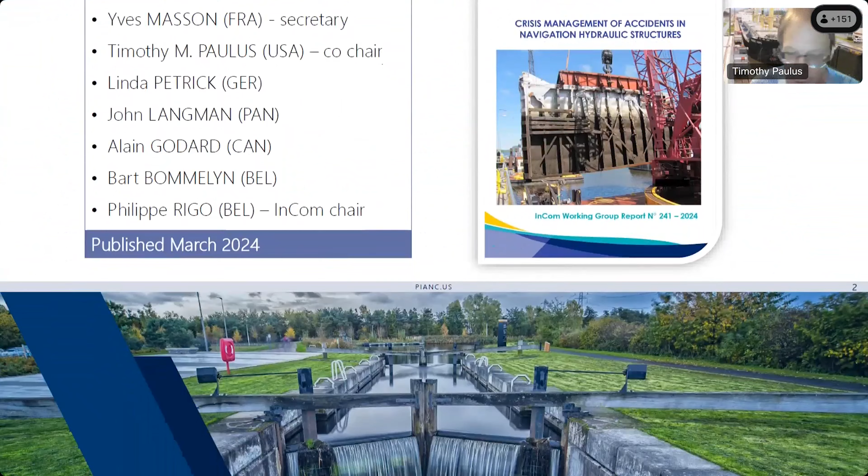Welcome everybody, thanks for joining today. My name is Tim Paulus. I work at headquarters, I've been at headquarters now for 4.5 years, coming up on 5 in September. I don't know how time flies, but it does. I've been at USACE now for 37 years. It's kind of funny, when I started back in 1987, I'm dating myself here, but I used to think people that were here this long were like dinosaurs, and now here I am. But hopefully I'm not a dinosaur.

I do want to make note, and I know Teresa mentioned this, but I got involved with PIANC back in 2010 on one of the working groups. It was a mechanical electrical working group. I didn't have a clue what PIANC was, but it's a pretty valuable avenue to really learn a lot, work with people all over the world, and get involved in a lot of different things. There are PIANC working groups on miter gates, for example, there's remote operation, there's a whole gamut of PIANC working groups. This happens to just be one of them. So I would encourage anybody, if you get a chance to actually work and participate on one of these working groups - I know everybody's busy with a million things going on - but if you really get a chance to do one of these, I would highly encourage it.

With that being said, here are the members of this particular working group, 241. This was published back in March of 2024, so just a few months ago. Richard Daniel, I don't know if Richard's on here, but Richard is the chair - I guess I consider myself a co-chair. Richard and I wrote a book together, and this happened to be one chapter in that book, this crisis management of accidents. So Richard took it upon himself to expand on this and make it an actual working group with PIANC. There's a terms of reference that has to be submitted and gets approved by PIANC, so Richard took care of a lot of that.

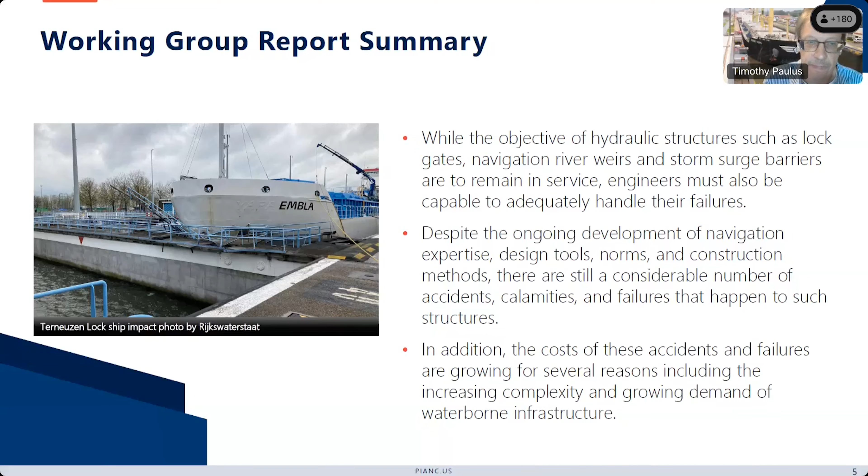So again, these navigation accidents - this report, and I'll get into that in a minute here, we did classify accidents, we did failures. A lot of times they result in the same thing: taking the lock or the navigation structure out of service. But they're very common. This particular photo that you see off to the right here, this is in Germany at the Iffezheim lock.

That happened back in November 2023, and then I've got another slide coming up on France at the Neufossé Canal back in September 2023. Thanks to Mr. Dennis Meckers in the Mobile district, I've got a couple slides on the Demopolis lock in the United States. We had a failure of the miter gate sill on that particular lock back in January.

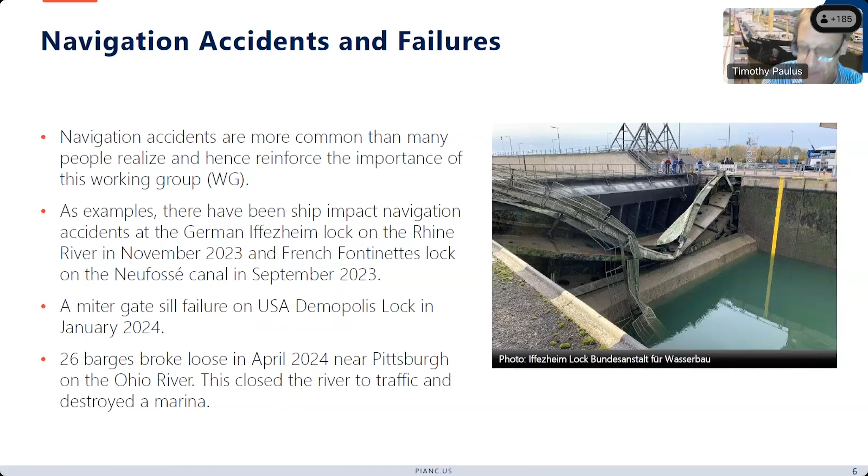Just in April, in the Pittsburgh district on the Ohio River - I don't know if anybody's on here from Pittsburgh district, we can elaborate more on that in the chat - a bunch of 26 barges actually broke loose. It closed the river to traffic. I think several of the barges hit a marina and destroyed a bunch of stuff. And I think some of these barges ended up, I think it was Emsworth Lock, where these barges ended up on the dam. So that was another very recent accident.

And then in February, there was a vessel collision with a railroad bridge in Germany over the River Hunte. This was a 110-meter inland vessel. It collided with the railroad bridge. So that's another recent accident.

And then just within the last week, I don't know if anybody saw this on the news, we got anybody from the Galveston district here, but there was a barge that slammed into a railroad bridge pier in Galveston Harbor in Texas. Oil got spilled into the water. One person was thrown into the water after the barge hit the bridge pier. He was rescued, fortunately, so nobody was injured or killed. But the tugboat backing out of the fuel storage area lost control of the two barges it was pushing. So that happened within the last week.

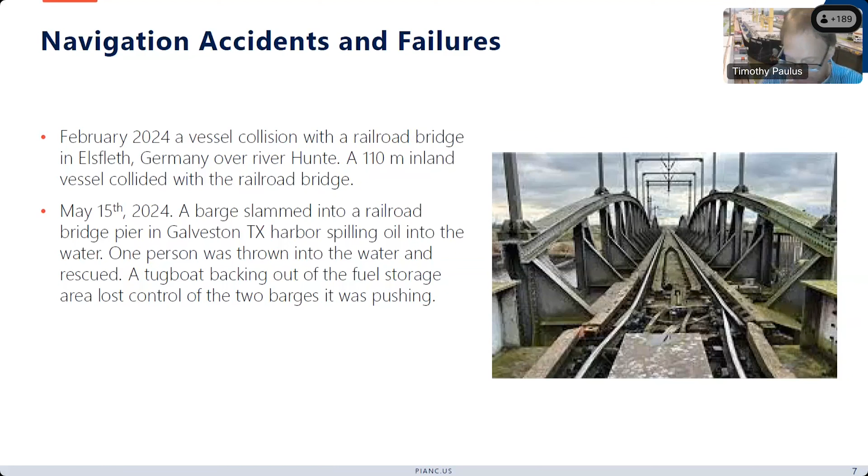Here's another photo of that ship impact on the Rhine River. This gate - at the time, fortunately, this lock has two lock chambers side by side, and they were actually working on the other lock chamber for maintenance when this accident happened. As you can see here, it completely destroyed the lock gate. It actually darn near went over the lock gate. So what they had to do was stop maintenance on the other lock chamber and diverted all traffic to it.

Now this happened back in November. If someone's online here, my counterparts, if they've got an update on the repairs of this particular lock gate, I'd appreciate putting that in the chat. But again, this happened last fall.

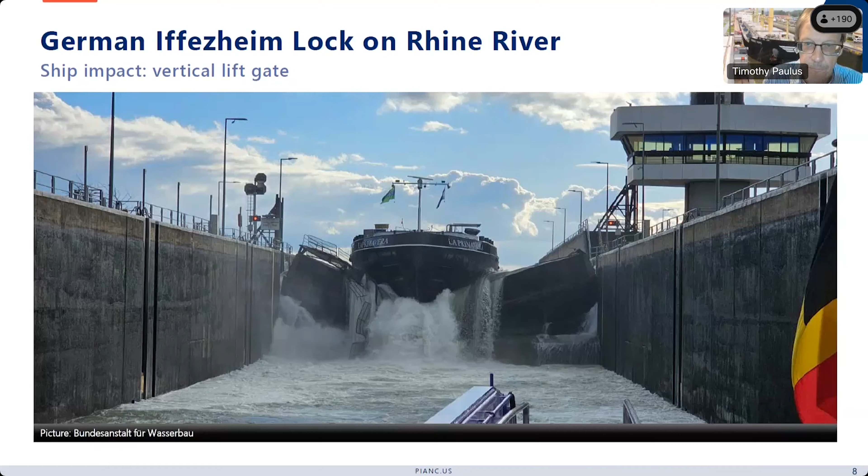This is the Fontinettes lock in France. So here, if you can see off to the right, the pilot actually had a green light to enter the lock chamber and move forward. So they did, but at the same time, the gate was closed. And then you can see some of the damage here off to the right. The ship was allowed to enter the lock - it had a green light. Fortunately, the damage wasn't extensive, but it did cause some damage to the gate itself without any major deformation.

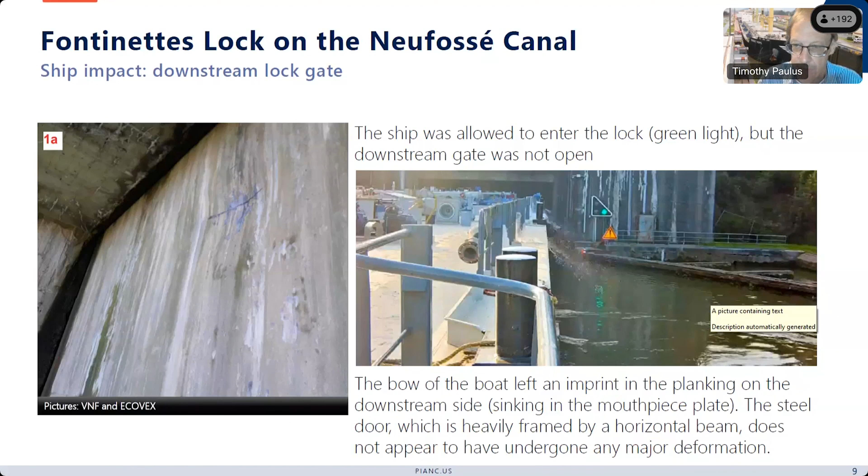This is the Demopolis lock on the Tombigbee River in the United States. This is what I mentioned previously. I know Mr. Meckers from the Mobile District was asking if there's any other locks we've had out here in the United States, or in Germany or France or Europe, where we've actually had a miter gate sill that blew out. This happened back in January of 2024 on the Tombigbee River. We actually had uncontrolled flow through this lock chamber for at least a few days. You can see the damage here off to the right.

I talked with Mr. Meckers, and Dennis, if you're on here, you can put some things in the chat. But just within the last one to two weeks, I think they were actually able to get the lock back in operation. So they're back up and running now, as far as I know.

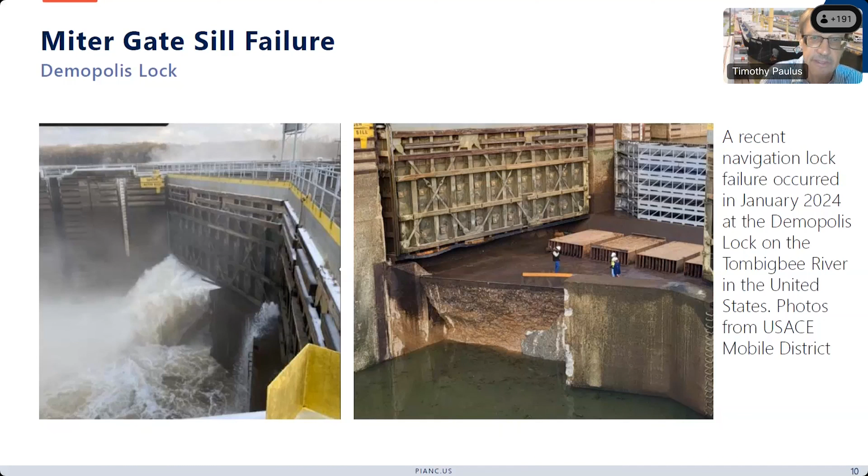So again, the key takeaway here is that accidents and failures with our navigation structures happen a lot. They happen frequently. So one of the things we tried to focus on in this working group report is crisis management plans - making sure these waterway organizations, like the Corps, but there's a lot of other waterway organizations throughout the world, have a crisis management plan, and it has to be adapted. It's a continuous cycle, trying to keep this up to date. The other thing is, when writing this report, there seems to be a real definite need for more guidance on this entire issue - how do we adequately manage these navigation accidents and failures? So I think this working group report is certainly a step in that regard.

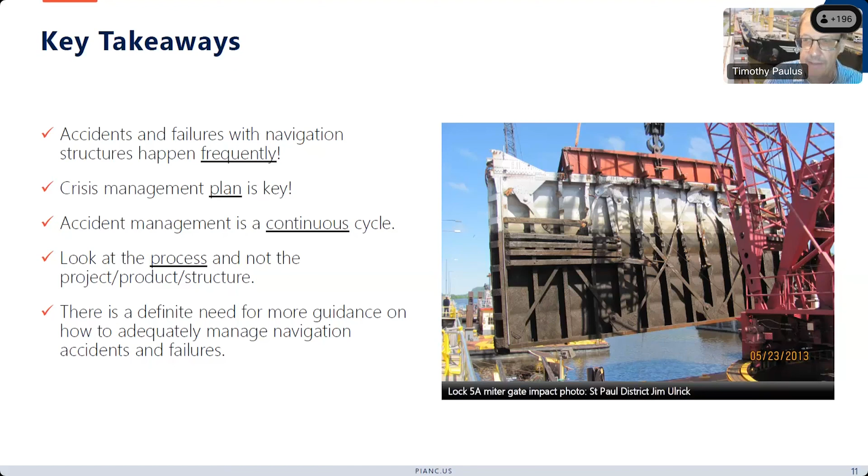Okay, this picture that you see off to the right here was taken by Jim Ulrick in the St. Paul district, but this happened at Lock 5A up in the St. Paul district on the Mississippi River. We had a barge that actually ran into this gate. Fortunately, they were able to swap out gates, so this lock wasn't out of operation real long, okay? But you can see the damage to the miter gate here.

A couple key takeaways: accidents and failures to our hydraulic structures, like lock gates and things like that, happen not only when their loads exceed the design strengths. Their causes include lack of inspection, improper maintenance, improper operation, sometimes navigation errors. We can get extreme weather events, fog for instance, that happened in the Netherlands. There are a couple of these case studies where they tried to stop the ship, and instead of stopping, the ship sped up. So it could be something like that. There are often combinations and really complex sequences of events that can lead to accidents.

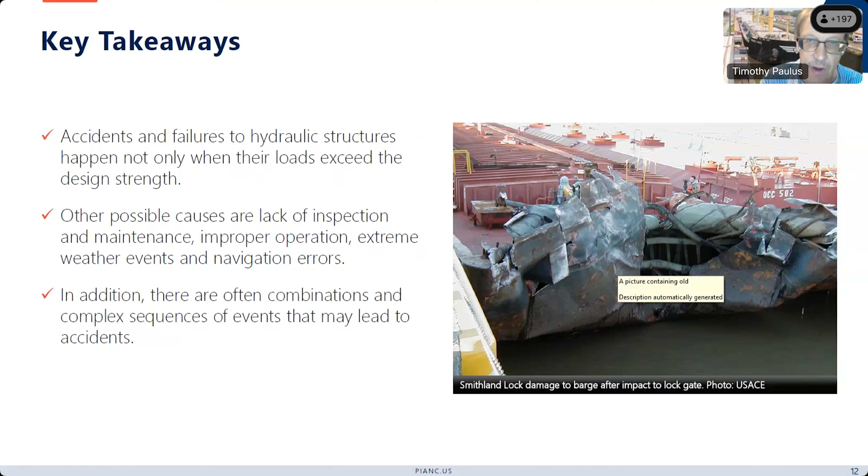That's another thing we noticed. This picture off to the right here is from the Smithland Lock, and Mr. Bob Petit provided that one. This actually crashed into one of our lock gates, so you can see the damage to the barge here. Bob, if you're on, if you want to provide any more information on that in the chat, that would be great.

Chapter 4, we tried to identify ways that we can reduce risk. Chapter 5, how do we investigate accidents? What are some of the ways that we do that in these different waterway organizations? Chapter 6, we looked at life safety risk. And Chapter 7, how do we recover from the damage? What are some good lessons learned?

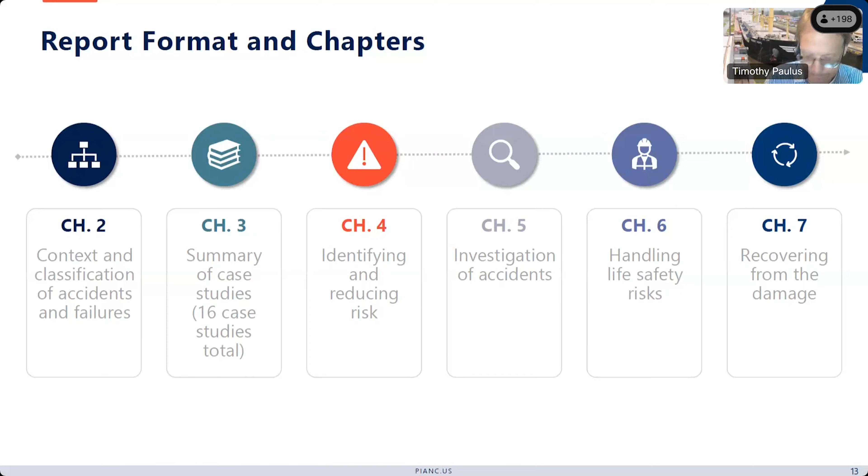So Chapter 2, it gets hard sometimes putting actual definitions on these, but we looked at failures, and you can see some of the definitions there. We looked at accidents, and then we also looked at calamities. We considered a calamity probably the worst case scenario. There are several definitions in this working group report, but certainly any time we lose a life, that certainly rises to that level. Tragically, on that Baltimore Francis Scott Key Bridge, we lost 6 lives. I've got coming up here, I'll show a couple other examples where we've actually had life loss.

We also looked at what we called regular demand, our normal maintenance and normal contracting procedures. A lot of times when we get into these accidents and failures, we've got a crisis situation and we've got to bypass a lot of our normal contracting rules. In USACE, we look at it this way: if our lock cannot pass traffic for 4 hours. I think the key takeaway here is that all these waterway organizations, whether it be the Corps of Engineers, have a really good definition of a failure. It doesn't have to be 4 hours, it could be 8 hours, whatever it is. It's important to actually have a definition out there.

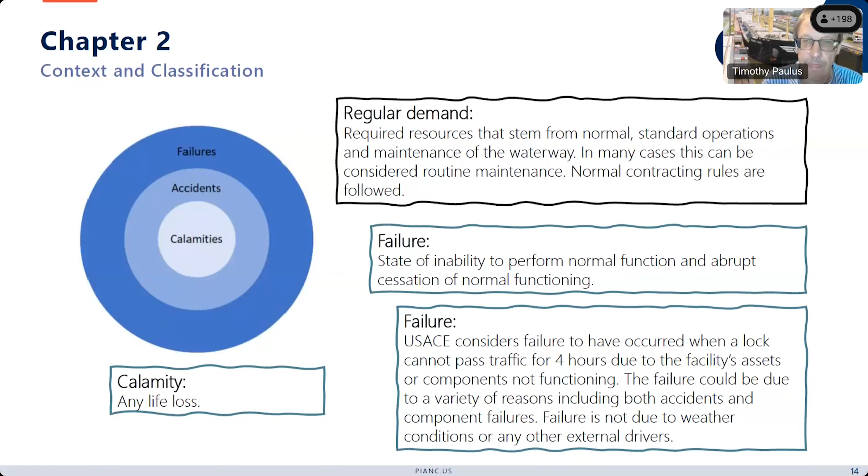A failure can have major consequences, it could certainly take the lock out of service. But sometimes we can get a failure and things keep working. For example, if we've got a computer controlled PLC, a programmable logic controller lock, and we get a failed computer chip, all of a sudden our signal lights aren't working properly, and it could slow down traffic. We can get issues with the machinery that reduce the speed, for instance on the miter gate, where for whatever reason we can't operate on high speed, we've got to be on slow speed. It slows the locking process. We can still lock boats, but a lot of times our locking might double. We can get a culvert valve that stops working, but if we have redundant culvert valves, we can still fill and empty the lock chamber, but sometimes our filling and emptying could be doubled.

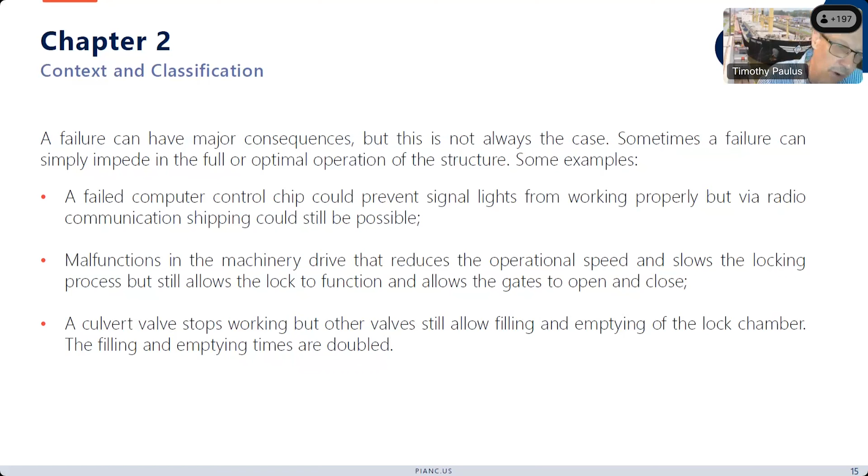One of the things we looked at in this report, we get a lot of multiple accidents and failures that can happen, like we saw previously here on these slides, but barge and ship collisions are certainly one of them. A lot of times these are low speed, but sometimes they can be high speed. The one you saw in Germany, and another one coming up on the Kiel Canal in Germany, that was actually a high speed collision.

We can get gate structural failures, connection and anchorage failures. We can get mechanical and electrical failures of our drive machinery. We get interlock failures - I'm going to talk about the Markland lock in the United States, where we had an interlock failure and lost a miter gate. Electrical power is certainly something we try to look at in the Corps, whether we need backup power at these locks. And vessel accidents, okay.

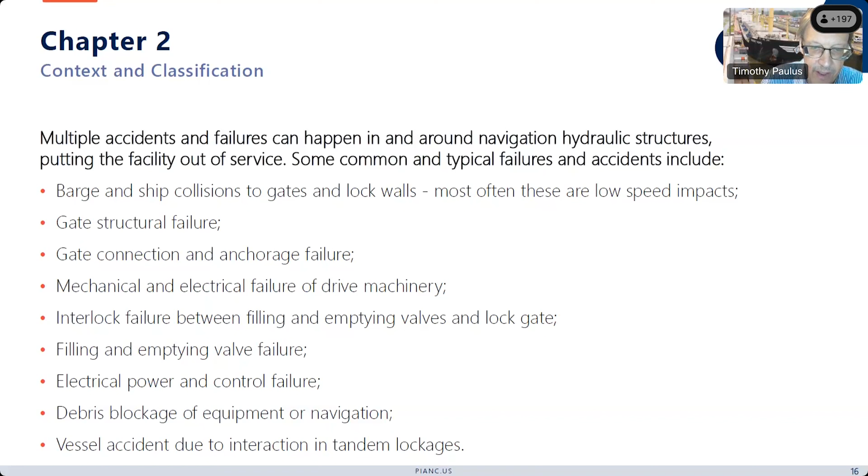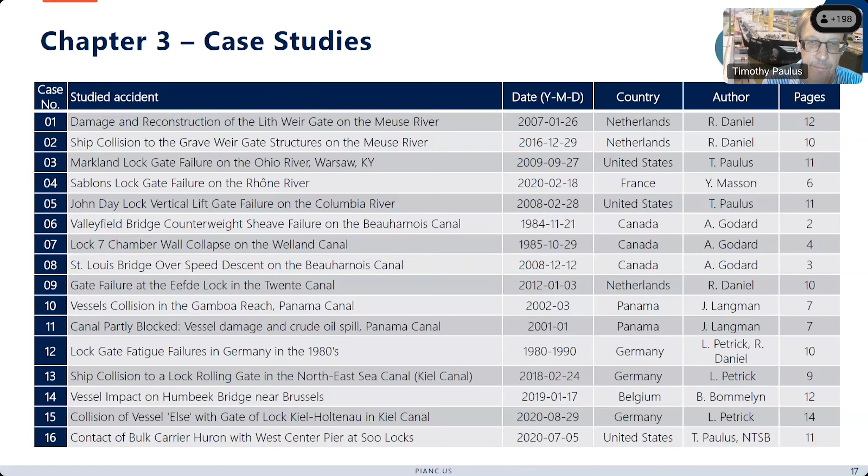And then in chapter 4, we tried to get into a lot of discussion on how we can identify and reduce risk. Interlock failures are certainly a big one - we've got to make sure that if we're opening gates, we don't have flow through the lock chamber and our culvert valves are closed, things like that. Barge and ship impacts, equipment malfunction, weather - a lot of times fog can be an issue. I'm going to talk a little bit about the Grave Weir in the Netherlands, that was a fog issue in part. If we get excessive ice or debris, or ship maintenance issues - there's a couple of those I'm going to talk about as well, okay.

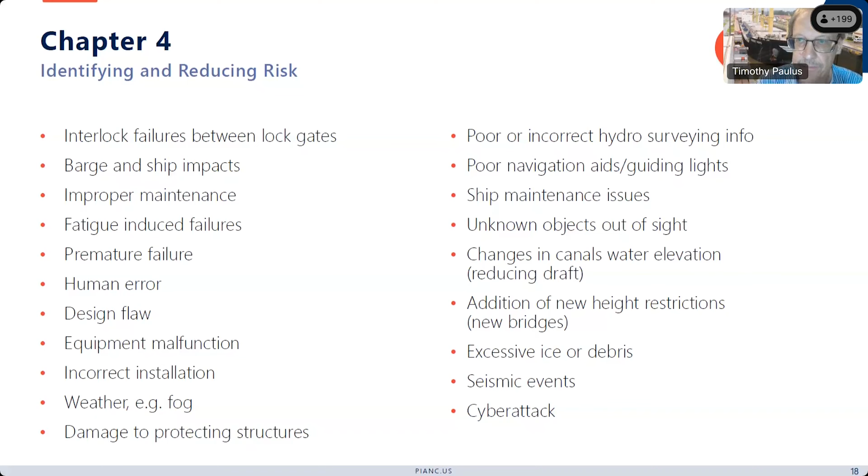One of the things the Corps of Engineers does, and I know a lot of you have been involved in these risk assessments, is on a periodic basis - I think it's still 5 years, someone can correct me if I'm wrong - we try to do a risk assessment on all our navigation sites, our locks and dams, looking at potential failure modes that could lead to accidents and closures. We define that failure as an uncontrolled, potentially life-threatening release of a reservoir and loss of a navigation pool greater than 4 hours, okay.

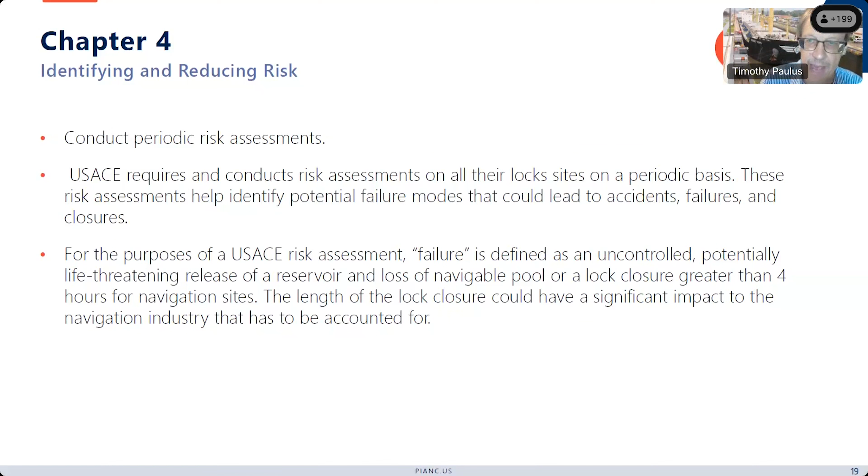So I guess the takeaway here is that, whether it be in the United States for the Corps, or in Germany or the Netherlands, our recommendation in this report is to make sure we do a risk assessment, looking at all the different things that could happen at these lock sites and navigation sites.

Chapter 5, we looked at investigation of accidents - looked at all the various ways these waterway administrations are looking at investigations. Thanks to Bart here, I forgot to mention earlier, Bart Bommelyn presented this working group at the World Congress in South Africa about 3 weeks ago I believe. So I stole some of his slides, so I should probably give him credit for some of this.

You can see what some of the takeaways are for a good investigation policy. We want to make sure that if there's things we can do to correct this in the future so it doesn't happen again - that's a really big takeaway - that whether it's a board of investigation or whatever, we make some very specific recommendations to make sure this accident's not going to happen again. And again, our case studies that we put together tried to address a lot of the things you see here. We tried to summarize that, okay.

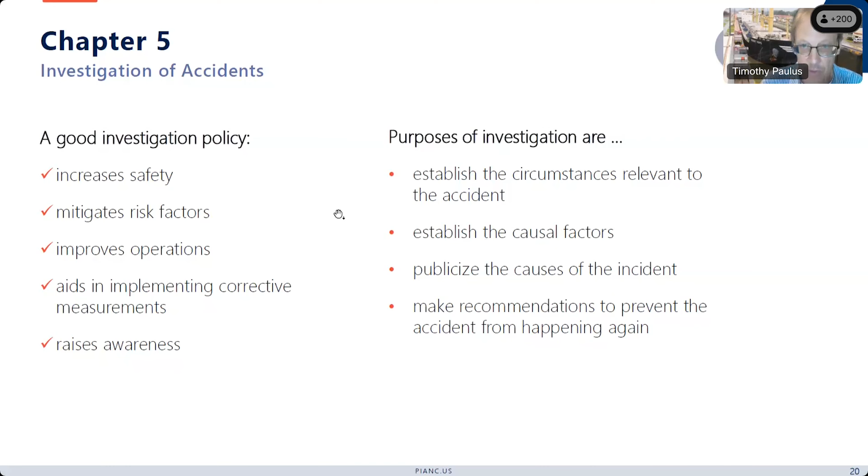Accident boards - the Corps of Engineers, depending on the severity of the accident and the dollar figure, we do have accident boards. I know the Panama Canal does. There are other waterway organizations that have accident boards, but this is a frequently used tool.

In the United States, the National Transportation Safety Board also investigates navigation accidents. If you go on to the NTSB website, these are all public documents. There's a lot of navigation accidents there - some just have a quick summary. I'm going to show a Soo Locks accident on the pier where they did a very detailed investigation. The Baltimore Harbor Francis Scott Key Bridge will certainly be involved too. But those are all public documents you can go look at, and if you scroll down you can see a lot that relate to waterways and navigation.

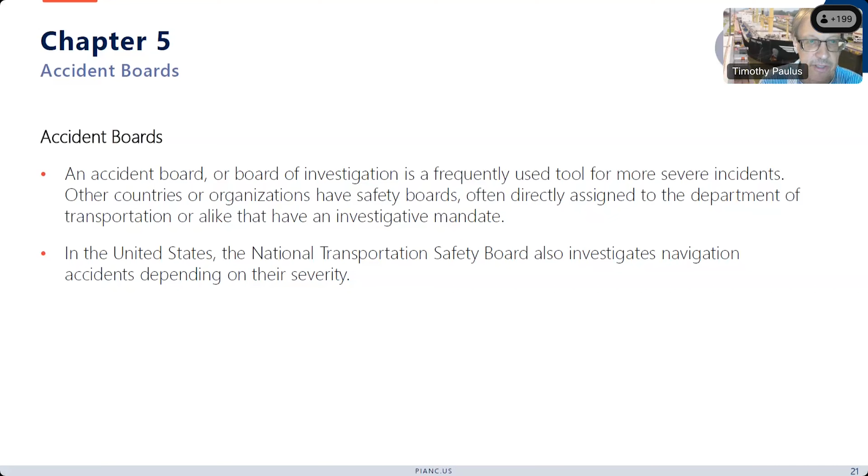Here's the Panama Canal Accident Board. I don't know if John Langman's on, but he could elaborate more in the chat. The Panama Canal has a local inspector board that investigates all the accidents. You can see the different things, whether it's a grounding or collision of vessels. I'm going to show a couple accidents on the Panama Canal - they had an oil spill, they had a ship collision. They'll certainly investigate things like that.

Teresa, how are we doing on time? I can't quite see my clock here with this on. Doing okay? We're right at the halfway point.

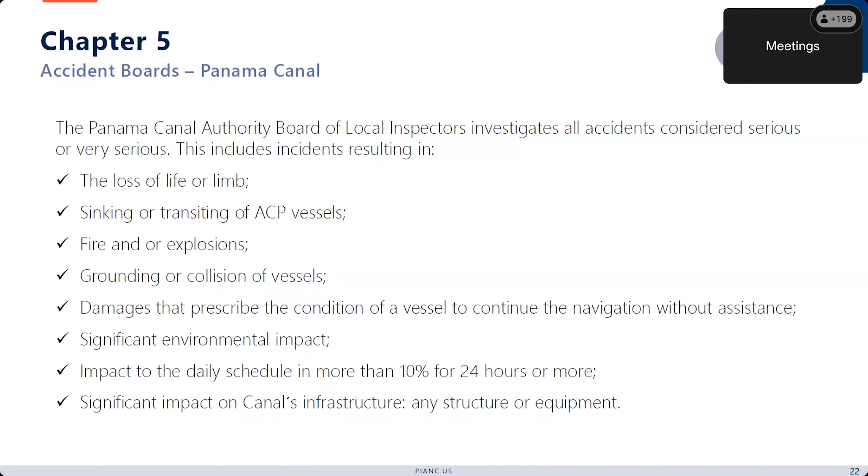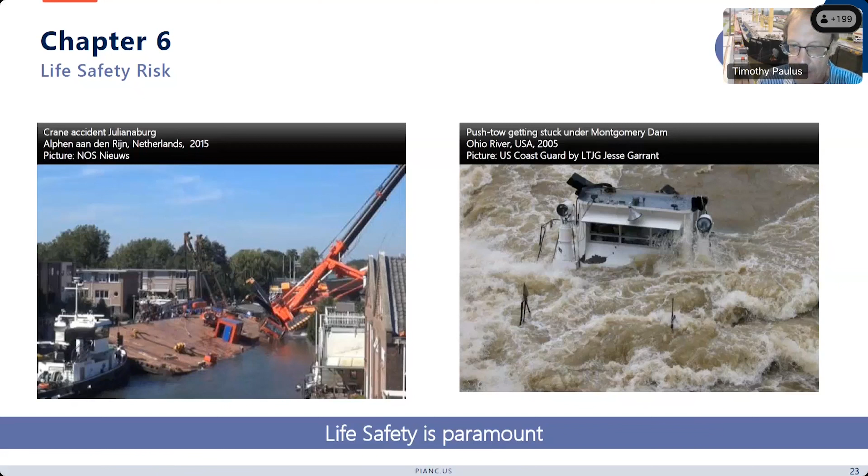Life safety risk - the slide you see off to the right here was at Montgomery Dam back in 2005. This was an upbound push tow, and there were really high water levels. When they came out of the lock chamber, the current pulled the barges in the tow into the dam. They lost control, as you can see here, and tragically 4 people lost their lives in this particular accident. So we did look at life safety risk in chapter 6, but the bottom line is we got to hold life safety as paramount.

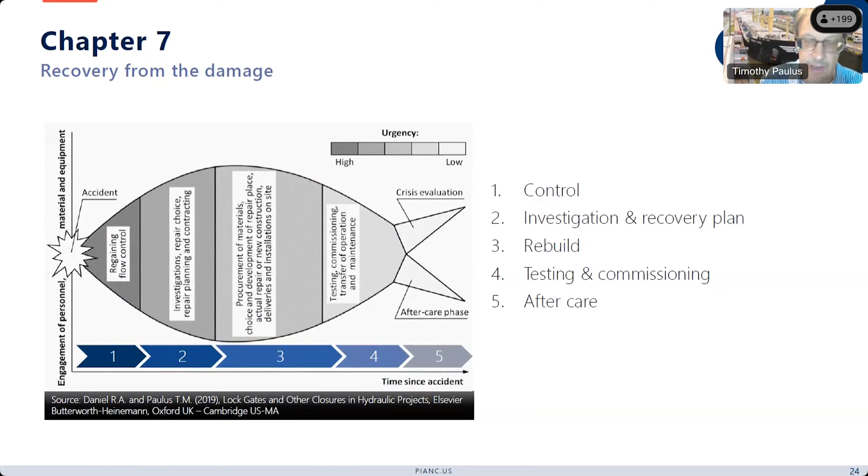So again, there's urgency to act immediately after the accident - we've got to get control of the situation. But a lot of times we don't have the equipment and the manpower at that time. These accidents happen and there's a really high urgency to get stuff fixed and under control, and a lot of times we don't have the equipment and personnel to do that.

For repairs, depending on the level of damage and things like that, USACE and the Corps of Engineers rely a lot on our in-house work. We've got some really good people at our locks and dams who can do a lot of different work, but sometimes we have to go to outside contractors. I'm going to show a couple examples here.

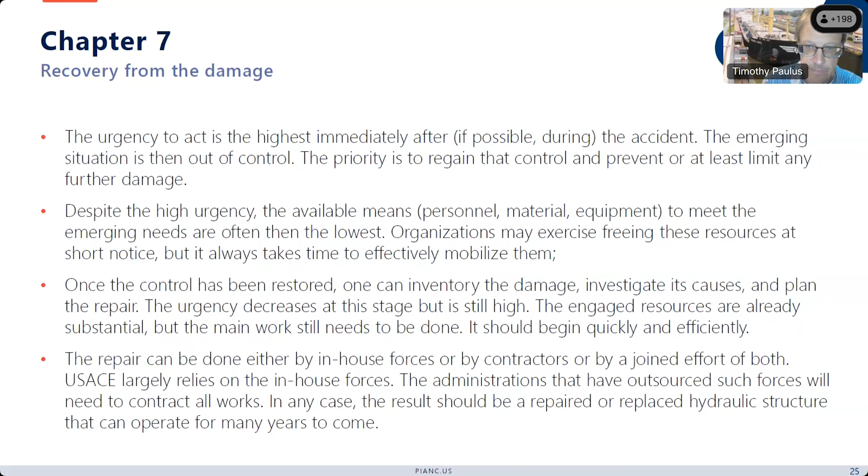Conclusions and recommendations - so again, we try to recommend best practices toward responding to these navigation accidents. And again, the major takeaway here is that these navigation accidents and failures happen a lot, more than people think.

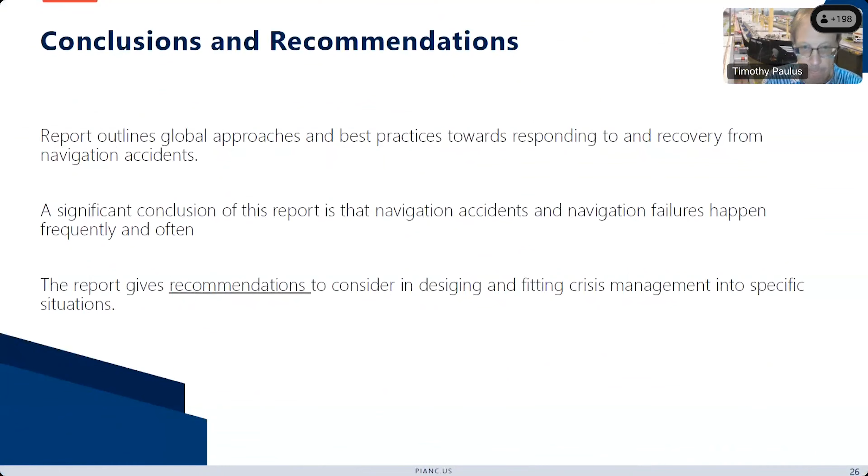A few more key takeaways here: every navigation site should really have a good continuous monitoring system in place. Provide a database that records and tracks accidents and failures - I know we try to do that in the Corps. And we want to make sure we've got a risk prevention policy implemented at all our navigation structures. I know the Corps of Engineers looks at risk on our navigation sites on a periodic basis, and it's really important to look at all the things that could happen.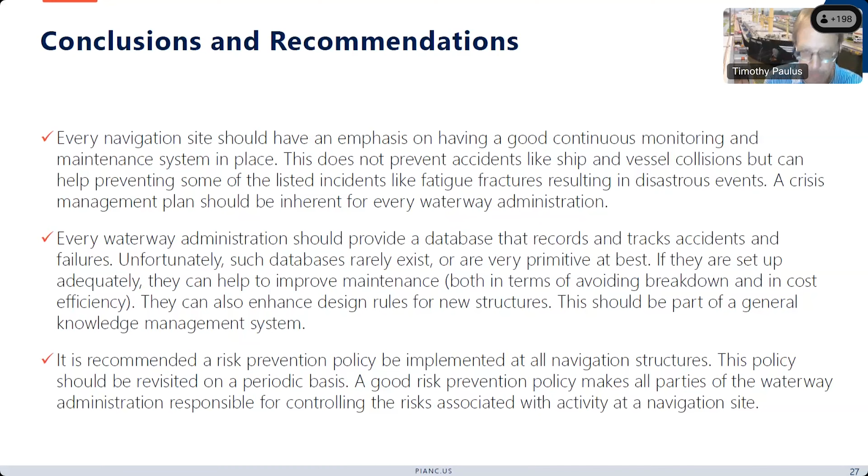So for the case studies, I'm just going to highlight a few of those. I'm not going to show all of them here, but I'll discuss more about the Kiel Canal in a minute - these are in Germany.

Here's a couple from our report on the Meuse River. The one on the left is the lift weir gate failure - this is managed by the Rijkswaterstaat in the Netherlands, and happened back in January of 2007. The top flap section actually broke off from the hoisting chain. The Meuse River is one of the highly traveled waterways in Europe, so it really posed a big threat to navigation. There were also really high water levels at the time, so when that flap was damaged, it damaged the main structural beams and destroyed the chains.

The one on the right is the ship collision with the Grave weir - that was actually a benzene tanker. There was fog at the time, and that benzene tanker was going at full speed. It actually went right through the weir. This weir is actually a bridge weir, one of the unique structures in the world, but it was dense fog at the time, so the benzene tanker went right through it. Fortunately, there was no leakage or anything like that.

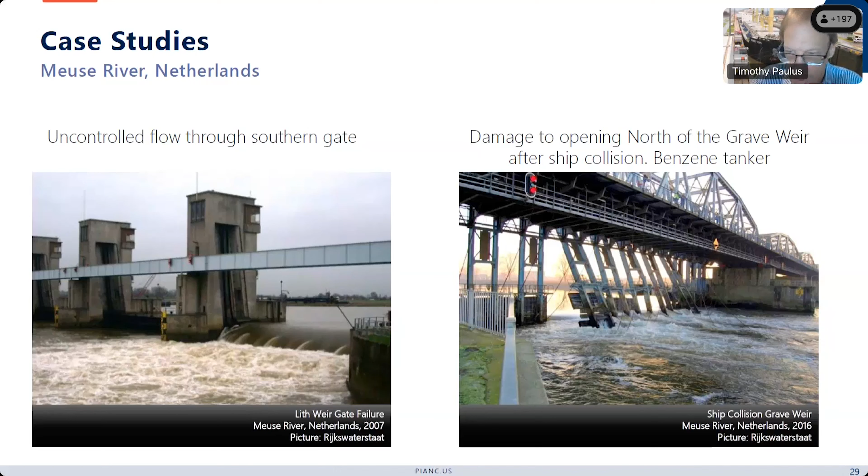So you can see on the right here, the Grave weir, they had to put a temporary rock dam in there to close that off to fix it. And then on the left there, you can see the Lith weir. They pulled the flap section out. As part of that work at the Lith weir, they also had to repair it. And Richard, if you're on, you can elaborate more on that in the chat. But they installed new chains. They have a lubrication means now for the chains also that they added at the time.

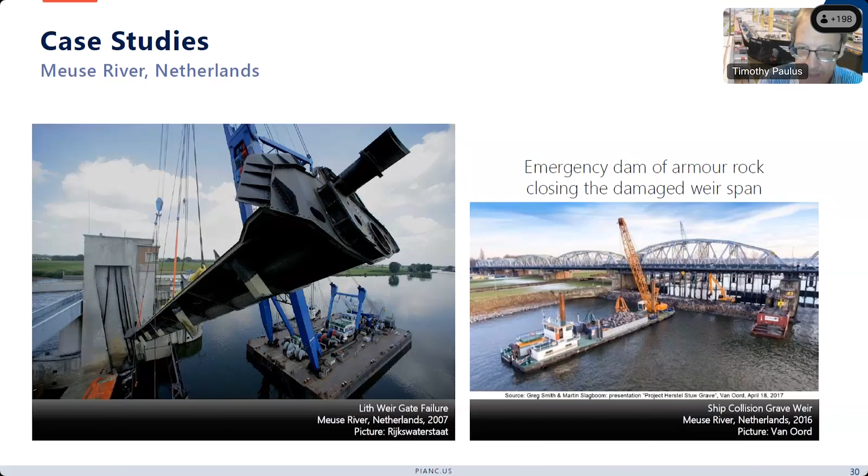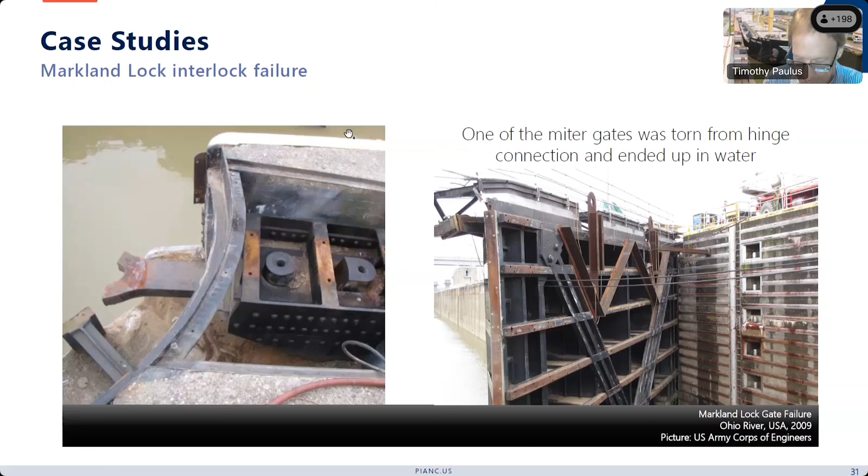So this was at the Corps of Engineers lock at Markland. This happened back in September of 2009, in Louisville District. They had a board of investigation report on this one. If anybody wants anything like that, they can certainly reach out to me. What they had was flow in the lock chamber when they were trying to close the miter gate. One of the hydraulic valves wasn't totally closed, so the culvert valve wasn't closed. There was actually a cruise ship, the Princess, that was in the lock chamber at the time this happened, and I think it actually snapped the mooring line. So they're lucky that cruise ship didn't capsize, but it actually snapped the miter gate right off its hinge.

And the miter gate itself ended up at the bottom of the lock chamber. Here you can see some more of the damage. This lock chamber was out for 155 days. They did have an auxiliary chamber, but it wasn't a 1,200-foot chamber, it was a 600-foot chamber. So it really had a large impact to the navigation traffic. It doubled the locking time, because they had to break the tows apart to get them through the lock chamber.

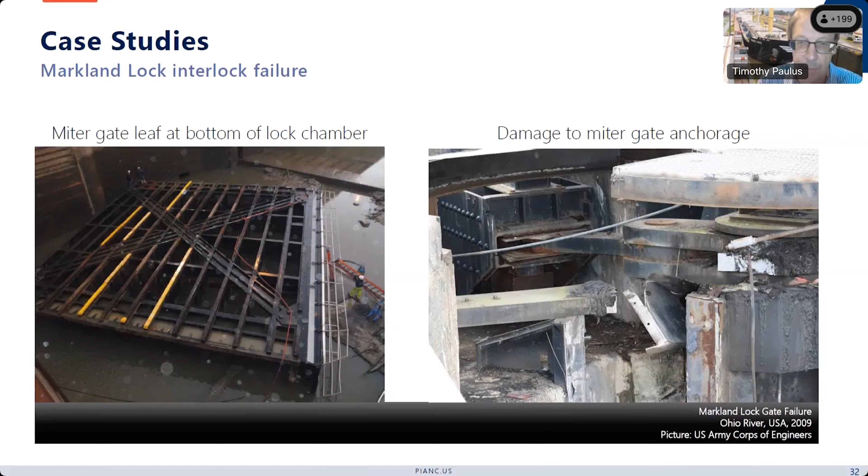John Day Lock out on the Columbia River. This happened back in 2008, actually in February of 2008. All told, there was about $10 million in damage here. There was a barge in the lock chamber, and the mooring line snapped. And that barge actually went underneath the upstream vertical lift gate and lifted it out of its channel, and you can see it ended up on the wall here. But when that happened, it actually snapped, or broke the lifting chains, and then the counterweights. This has a counterweight on it, and the counterweights actually dropped, and you can see some of the damage to the sheave here. There was extensive damage here at John Day.

One of the things they did is they worked around the clock to get a floating bulkhead to replace the gate. So they were able to get this lock back into service fairly quickly using that floating bulkhead. That barge that went under there was actually a diesel fuel barge. They didn't have any leakage of oil, fortunately, but their lockage time went from about 20... This is a really high lock, it's a 30-meter lift. Their lockage time went from about 20 minutes to 1 hour.

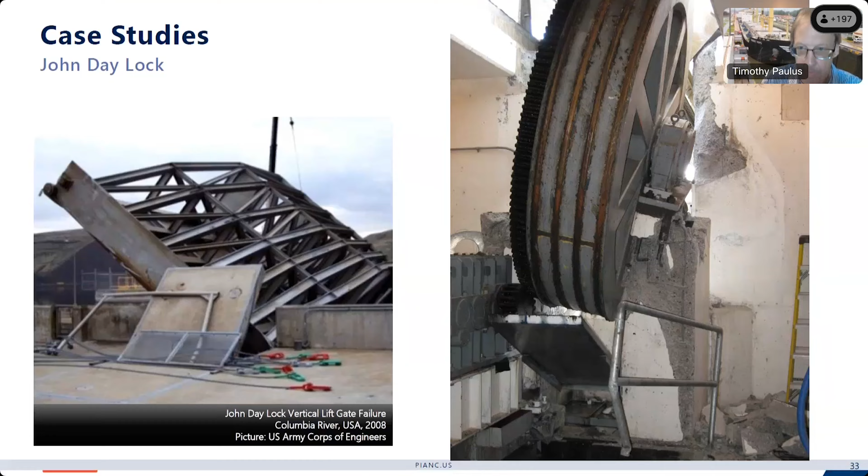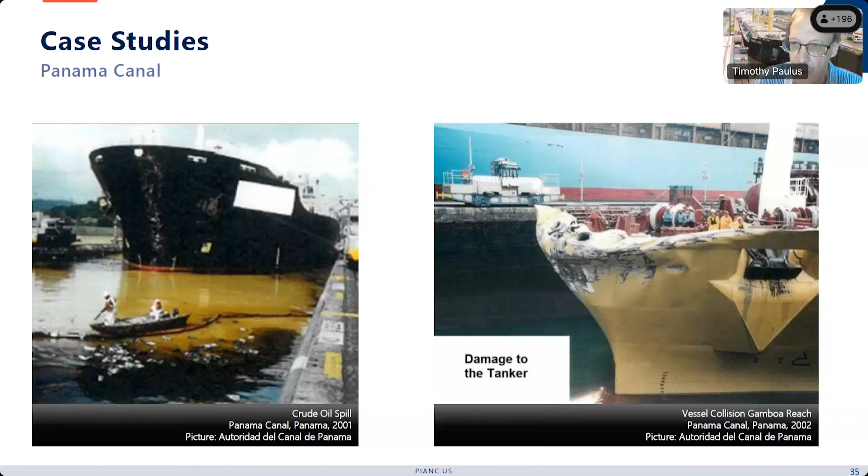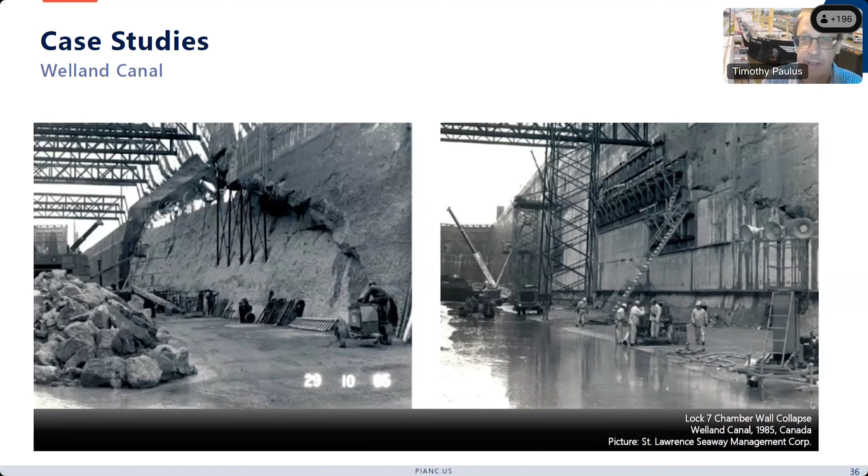Once that happened, the upper gates were already open, so it was like a waterfall coming through this lock. At this particular site, and it's still there if you ever visit the Soo Locks, there's an emergency dam - it looks like a bridge. They were able to set this and stop the flow through here. That bridge is still there - not a bridge, but an emergency dam, if you will, that looks like a bridge.

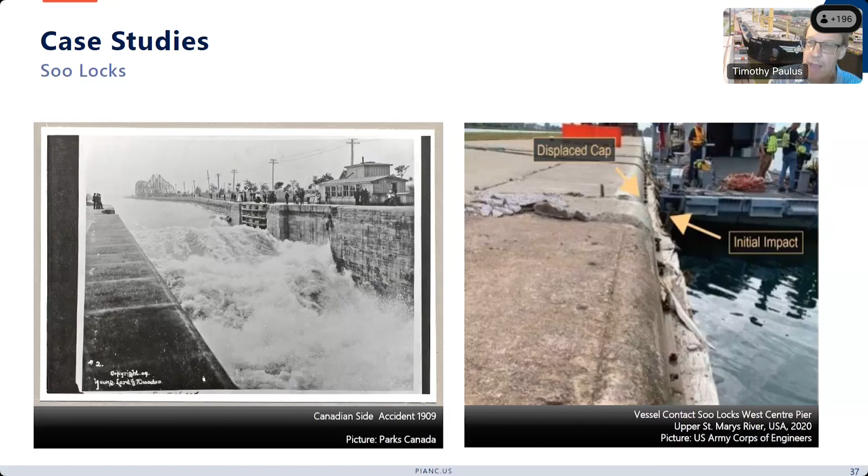The one on the right here was back in 2020. Fortunately, this hit the guide wall and not the gate here at the Poe Lock. Let me pull up the next slide - you can read it there. This was a really, really in-depth report that the National Transportation [Safety Board] did, as you can see here.

This was an issue with the set screw, if you will, on the pitch system for the ship. They tried to slow down as they were coming into the lock chamber, but instead of slowing down, the speed actually did the opposite - it was increasing. So like you saw in the Kiel Canal, they tried to drop the anchor to slow the ship down. That worked a little bit, but they ended up crashing into the guide wall.

I think the total damage here was on the order of - I don't have the exact number in front of me - but it was several million dollars in damage. You can see some of the damage on the ship here, but this actually hit the west center pier at the Poe Lock. Fortunately, no one was injured, and there was no oil or anything leaked into the water. They use ship arresters at this particular lock, but the ship never ran into the gate itself.

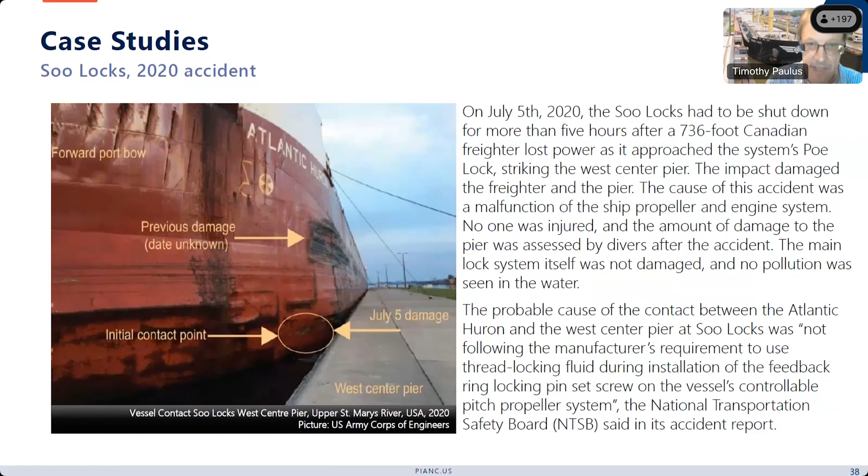So with that, that's a really quick snapshot of our report, our 241 report. I didn't get into a super amount of detail on all the parts and pieces of the report, but I wanted to provide a little snapshot of some of the case studies we looked at. A big takeaway is that these accidents happen a lot. And I'm going to stop sharing.